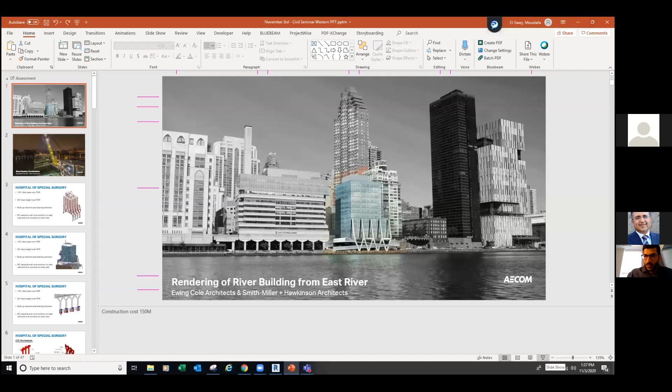Yes, okay. So before jumping into the main topic of today, we thought we would share with you one of the very challenging projects we've been working on for a while, almost 5 years now. It keeps changing even after we finish most of the design stages. It's the Hospital of Special Surgery, which you can see here.

It's located on the east side of Manhattan by the East River, and the unique thing about this project is that it's not built on land. The client had to purchase air rights from the city, essentially a volume of air he can occupy with structural and architectural elements. This provided challenges for us, as I'll talk about later, since we were constrained to the volume of air he purchased and couldn't go even inches out of it.

So this is our structure. It consists of 12 stories and a penthouse, and it's also designed to take 4 future expansion levels. It's made up of built-up columns and trusses to ensure it can span 100 foot across the FDR, and the highway will be functioning after this is built, with cars allowed to go underneath it as usual.

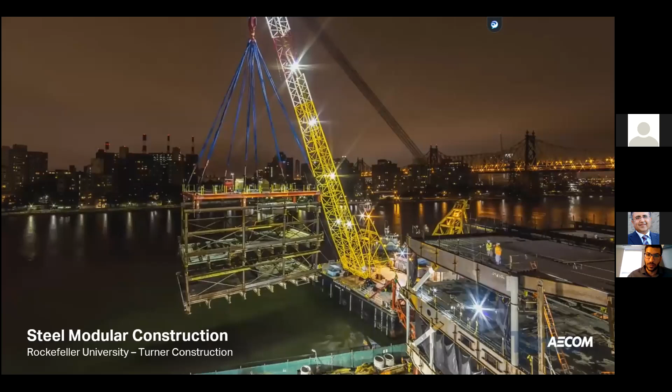We would divide the first 3 floors into 3 modules, constructed off-site and then carried on and placed on top of the highway. These would be spliced together. Then after the 3 stories are complete, we are able to build up on top of the existing platform and continue construction until the 12th floor. So that was one of the main challenges we had, and I'll be speaking about more challenges as we go through.

So here is a rendering of the structure, let me place this here. Okay, so here we have a rendering of our structure. This is actually the initial design we had. It spans 100 foot over the FDR, which flows in both directions. We also had a 20-foot clear height over the FDR.

We used built-up columns consisting of 4-inch plates. These are custom columns made to specifications and to the architectural shape we required on both sides of the structure. We also had RC caissons and rock anchors, not shown here, which drilled through the rock to ensure we have good lateral stability in our structure.

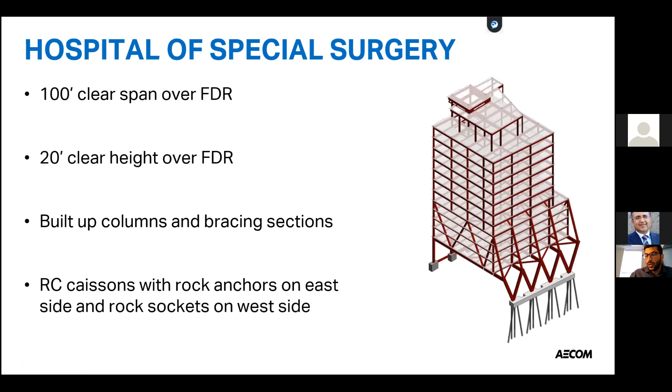As usual, architects are always our enemy when it comes to our design. They consistently change the design last minute. Even though we've been working on this for a couple of years, just recently they decided to change the shape of the Y columns. Suddenly the client doesn't like the way they used to look. So we had to come up with this new shape, a Y column made of 4-inch plates.

This obviously changed a lot of the behavior of our structure, the rigidity in both directions. So we had to add this built-up girder, which also consists of 4-inch plates. We also had to add horizontal diaphragms to ensure the load will be transmitted to all our Y columns.

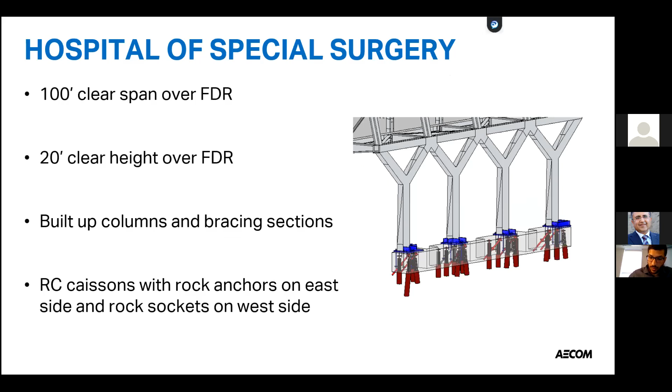Another challenge in this building, going back to this rendering, is that we had very limited air space that the client bought from the city. Since in Manhattan every square inch of space matters, the client obviously wanted to push it to the limits. So our steel framing at the bottom flange was exactly at the air right limit we had.

So we didn't even have space to spray fireproofing on top of the structural elements that are exposed to traffic. The code requires that any structural elements exposed to traffic be designed with either fireproofing, or if you deviate from the code requirements, you'd have to provide enough documentation and analysis to prove that your structure can take fire loading in case of fire.

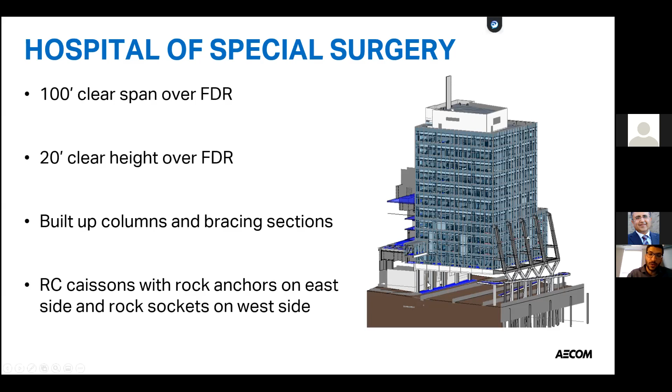Specifically, we had cars going underneath our building, so it's very probable that a car would catch fire for any reason, and then this heat or energy would be transmitted to our structure in terms of increased temperatures. So to convince the city that we didn't need fireproofing, we had to do some CFD fire analysis.

We had two cases. We had the flow of traffic traveling north across the FDR, in which case we would have the Y columns, and traffic traveling south, in which case we would have the west columns.

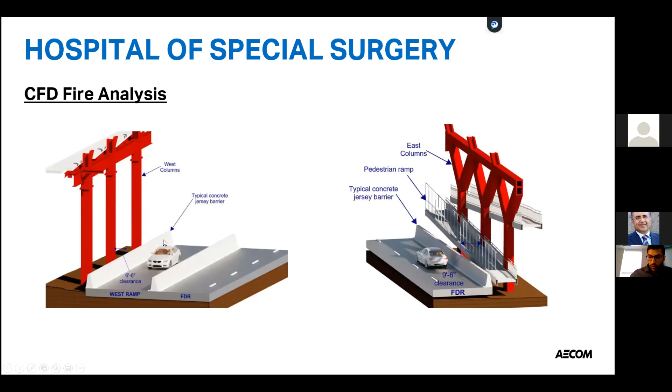So we performed CFD analysis on ANSYS, I believe the CFX solver, if I'm not mistaken. The several parameters we had to take into account were the ambient conditions, the direction of the wind, and the temperature of the atmosphere at different times of the year.

Also, a big part of the input was the type of vehicle that is prone to explosion or fire, and this was a big back and forth with the client until we reached a suitable vehicle. Corresponding to this vehicle, we would get the amount of energy, or a curve of the energy with time, produced by this vehicle. After obtaining this information, we would be able to run the analysis.

Basically, what we need from this analysis is the temperatures along the surface of steel or columns. Based on this temperature, we would have two phenomena: steel at elevated temperatures would experience a reduction in the steel material properties, and there would also be some thermal loading transmitted into our structure due to expansion of steel.

So after producing this fire analysis and applying the modified steel properties and the loading into our finite element model, we proved to the city that our structure can withstand fire loading safely without any fireproofing. So this was a big part of the project.

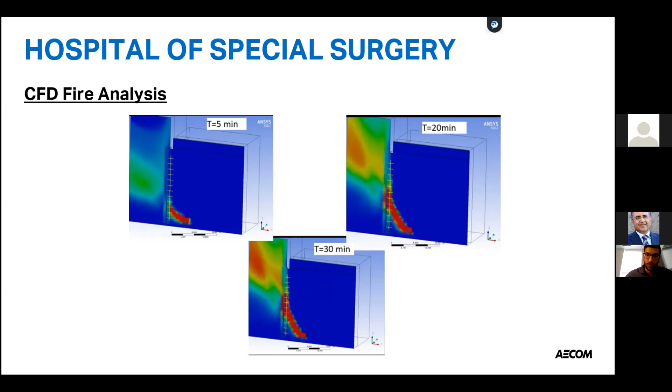Our calculations were peer-reviewed by a third-party reviewer, and they showed that they were suitable and everything was good. This was approved by the city. And then...

Let's dig into the topic of today's talk, which is the vessel collision analysis and design of a pile-supported fender system. This was a very unique project to me, and I think to our office, because this is the first time we were actually working on this. This was a proposal, and then we finally won it, and I think we just completed the 100% design recently, and construction is supposed to happen soon.

So an outline of what I'll be going through today: I'll start by talking about the introduction of why a fender system is needed, what initiated this movement, or the motivation of the research to look and analyze systems under vessel collisions.

I'll also touch on examples of different fender systems ranging from different sizes and different shapes. Then we'll discuss the vessel collision analysis and the different aspects we have to take into account. Fender system design, which I think is probably the most challenging part for me, as it requires a lot of experience.

Constructability aspects and details, and what we had to think about ahead of construction to make sure that we had no issues during construction. And finally, a summary.

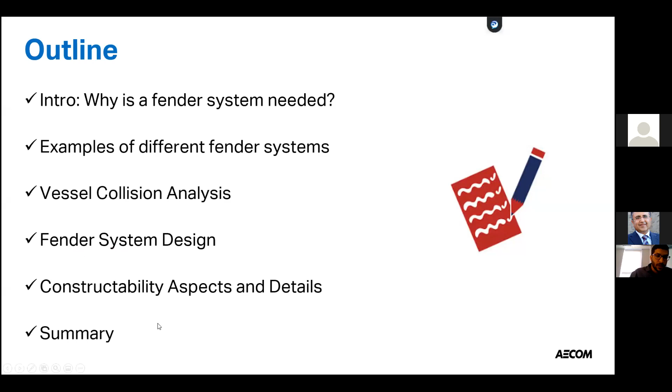Okay, so it all happened in 1980. There is a bridge called the Sunshine Skyway Bridge, situated in Tampa Bay, Florida. It was a peaceful day. You can see the bridge had, there were actually two bridges in parallel, one for the northbound traffic and one for the southbound. And then on this specific day, the weather conditions were really bad.

This caused a huge vessel, a 35,000-ton deadweight tonnage bulk carrier, to collide with one of the bridge piers. This collision caused excessive vibrations in the girder and in the deck, which caused the collapse of a span of 1,300 feet, approximately 400 meters.

And I apologize in advance. I know you guys are used to the meter system, but in the US, we use the feet, the imperial units—I mean, the English units, sorry. So I'll try to mention both in the presentation.

This collapse caused 35 lives to be lost, which was very unfortunate. And then a few years later, in 1987, you can see they built the new replacement bridge.

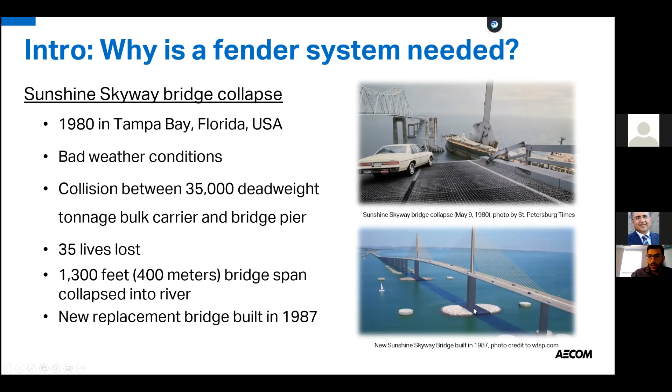And here's the new bridge, which still stands today. As you can see, they implemented some of the fender protection system, which I'll be discussing in the coming slides.

After this collapse, this was the first rise of guidelines providing hints and good engineering standard practices on what to do when designing a bridge pier to take this vessel impact. It's called the Guide Specification and Commentary for Vessel Collision Design of Highway Bridges, developed by AASHTO. It was first published in 1991, and later updated in 2009.

Basically, what they updated was removing most of the simplified methods. In 1991, the computational power of computers was not as advanced as today, so they included more sophisticated types of analysis and removed some of the very simplified methods.

This is adopted today for all bridges constructed in the United States, only if they have a channel where vessels or ships can go underneath.

The basic concept of this guideline is to minimize hazard to life. Risk of bridge service interruption is minimized to ensure reduced losses and reduced lives lost due to any collapse.

Specifications need to be simple and unambiguous. Ingenuity of design is not restricted, so AASHTO allows you to use any type of analysis you prefer, given that you can prove it works. And the provisions are applicable to all of the United States, as mentioned previously.

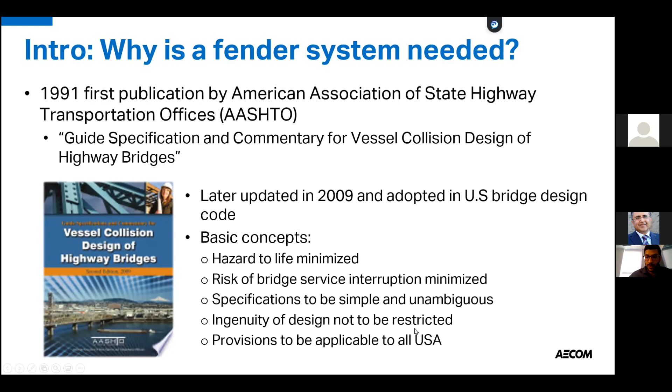Energy absorbing fender protection systems are used worldwide. This is a very common system for low impact forces, where you'd provide fender systems along the edge of a pier or along the edge of a slab where ships are expected to be traveling.

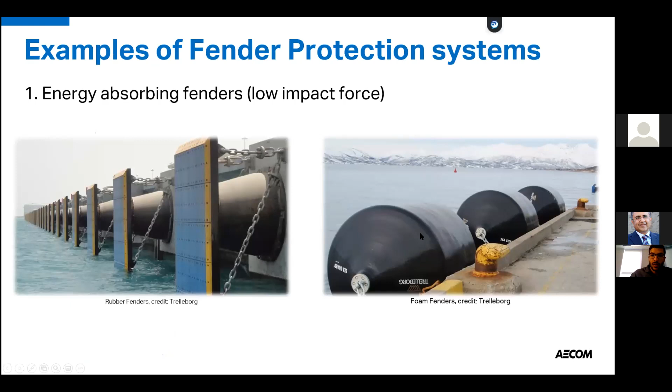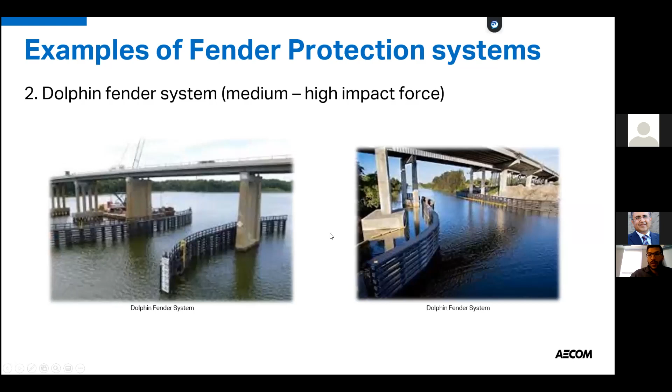Going on to a higher impact force system, which is a Dolphin system - basically piles drilled into the ground and a wall system which would redirect the vessel in case it steers off its path. Here's another view of this Dolphin fender system.

Finally, a system used mainly in the past was the cellular cofferdam system, which consists of sheet metal drilled into the ground. There's an interlocking mechanism in those sheets, and then you'd fill it with soil to provide good solid inertia and also to prevent these thin walls from buckling.

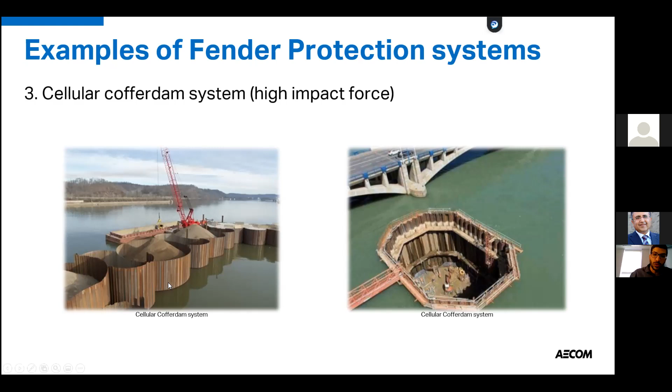Jumping into the vessel collision analysis, AASHTO considers this an extreme event, which is very unlikely. So you would not need to increase or provide any load factors - the load factor is 1.0.

There are several methods to absorb this force. You can design your system as a sacrificial system or a non-sacrificial system. From the wording, sacrificial means that after the collision happens, the system would not be usable anymore, so it would have to be replaced. The behavior we're expecting here is inelastic.

For a non-sacrificial system, you want the system to still be usable after the collision, so you'd have to ensure the behavior is elastic. This approach is very expensive and rarely used.

Finally, the simplest approach is to actually design the bridge pier itself to take this collision. You don't want the bridge to collapse, so you'd have to ensure the behavior is elastic.

Going into the numbers and details: the way to determine this force and energy is based on several parameters, a big part of which is the risk and geometric probabilistic analysis, which I'll touch on later. It's also a function of vessel parameters - how much you're expecting the vessel to weigh, its cargo capacity, the dimensions, and the speed of the vessel.

You're also considering the channel parameters - the flow of the river, the speed of the river, the channel width - and most importantly, the bridge parameters: how important this bridge is. This is similar to the importance factor in conventional design. If a structure is more important, you'd multiply the forces by a higher factor to reflect this importance.

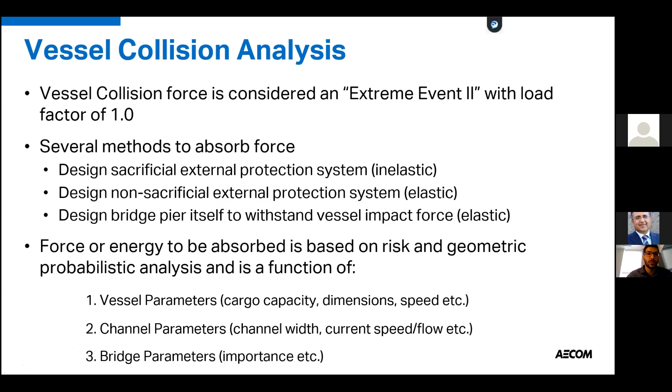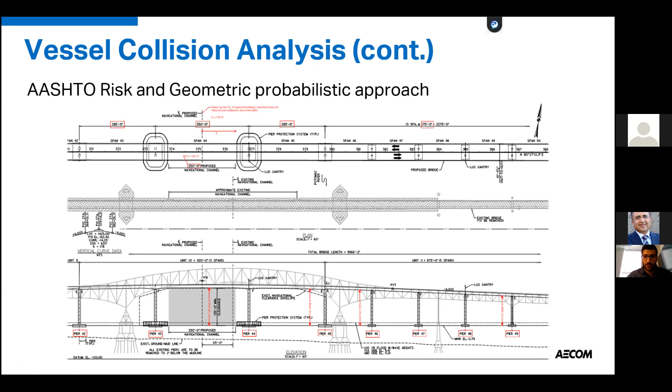So you should also consider different impact angles. Obviously, the sharper the impact angle, the less likely it's going to occur, which leads to less force demand that you need to consider in your analysis, or energy demand essentially.

This is a chart from AASHTO which shows that as you move further from the center line of the vessel movement, your velocity decreases, which makes sense. And velocity is directly proportional to energy, so as the velocity decreases, the energy decreases.

So just to give you an example of the type of energy or impact we're expecting for this specific design, for the collision shown in red, which is a head-on collision with an angular deviation of zero, this requires 44,600 kip-foot of energy, which I know can be hard to get a feel for.

But another way to think of it is that this is equivalent to a typical sedan car, which weighs 1,350 kilograms, traveling at approximately 330 meters per second, equivalent to the speed of sound. So this is a huge amount of energy that you need to absorb in your system.

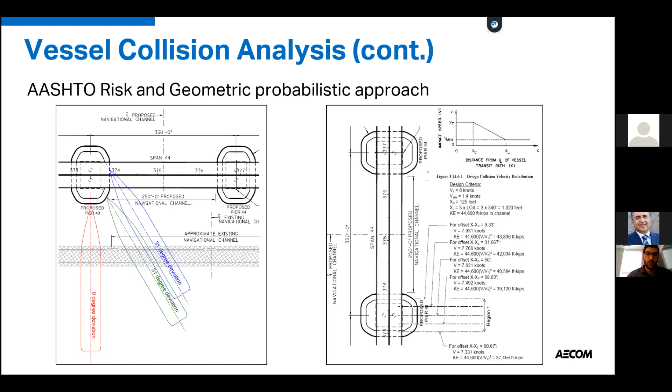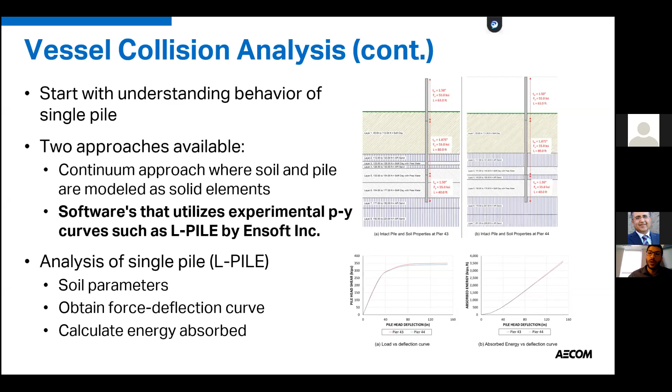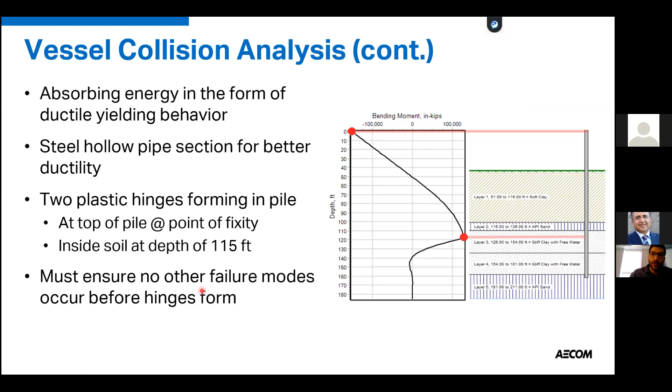And here we have our soil layers. We had different types of soil, nothing special, nothing problematic according to the geotech. It was very vital for us to ensure that we would get our full ductile behavior and not have any other mode of failure happen before these hinges form.

But as you know, LPILE has certain limitations, which is very important when working with any software. There's a famous saying: garbage in equals garbage out. If you're using software and don't know its limitations, it's of no use. A software is only a calculator for you—if you don't know what you're punching in, getting answers is never going to work.

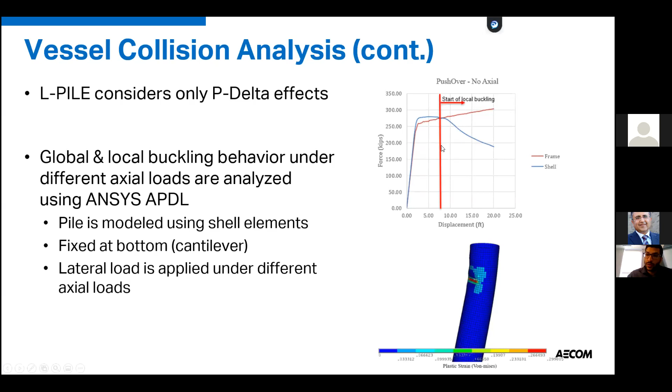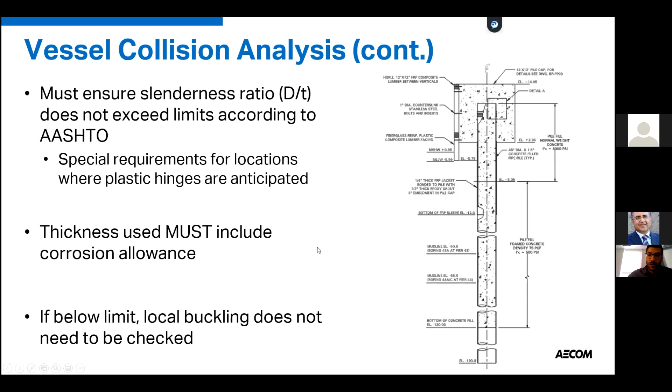These are the corrosion values we were given. For the first portion, inside the FRP jacket, we had 0 corrosion inside and outside. For the part submerged in water, 0.03 inches inside and 0.075 outside. And for the part buried in soil, 0.03 inside and outside.

The reason the part buried in soil has less corrosion than the part submerged in water is that corrosion is directly related to oxygen availability. In soil, the available oxygen is less than in water, so we get less corrosion. This is the total amount of corrosion we had to consider in our analysis.

The code provides slenderness ratio limits based on whether your section is filled with concrete. Obviously, if it's filled with concrete, the concrete provides bracing to the walls, so the requirements won't be as stringent. It also provides special requirements for locations where plastic hinges are expected to form.

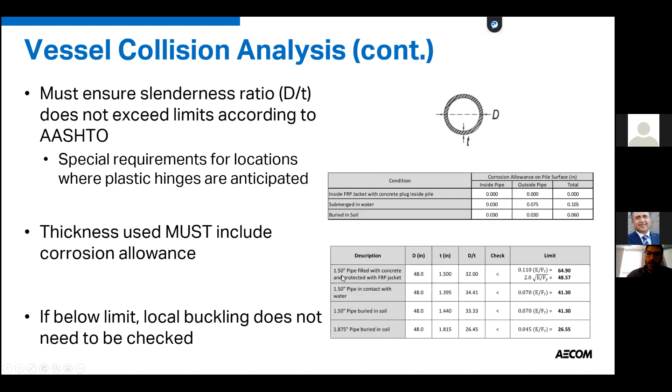We had to take into account all of these limitations, and these are the thicknesses we reached. We had a varying thickness along the height of the pile.

So after understanding the single behavior of your pile, we can now move on to the global behavior for our system. Here's a plan view of our system. Our pile cap fender system consisted of 12 steel piles.

Each pile was 4 feet in diameter, and the thickness varies from 1.5 inch to 1.875 inches. Here's the pier that we were trying to protect. We tried several times back and forth with the bridge engineers to make this as small as possible so we can get enough clearance to allow for more energy absorption. So it's back and forth, and this is as small as we can get them to reach.

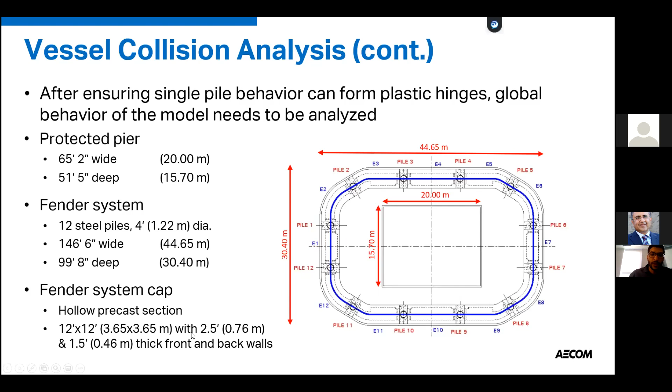Our fender system was approximately 45 meters by 31 meters in dimension. We also had to ensure that we reduced the P delta effects since we were considering large displacements of the system, which pushed us into this option of using hollow precast sections. We would have a 12-foot by 12-foot section with a thicker front wall than the back wall, because this is where the vessel would impact. The front wall was 2.5 feet thick and the back wall was 1.5 feet thick.

Here's a snapshot of our full model. This is done on ANSYS, as I mentioned previously. Everything was modeled using beam elements. The piles were modeled using beam elements, beam 188, for people who are familiar with ANSYS.

The model considers a lot of nonlinearity. Here are some of the things that it considers: full nonlinear stress strain behavior of steel, P delta effects including small P delta effects, pile soil interaction since we had our soil modeled as nonlinear springs, and also global buckling effects. Soil is modeled using nonlinear springs, the COMBIN39 element.

Also a big challenge here, which is also fun for me, is how to connect software together. So we had to develop a script to read the LPile output text files and convert these springs to ANSYS. You have to keep in mind that each of these piles is approximately 190 feet, and you would have a spring at every 1 foot, obviously in the part which is buried in sand. And the spring was a full nonlinear curve with different points, and every spring was different because soil behaves differently as you go deeper.

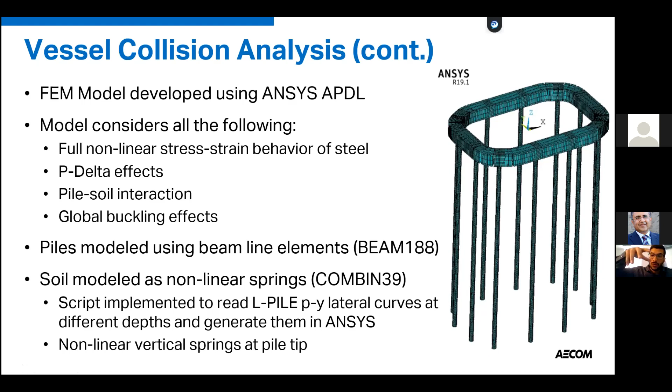Initially we placed stiff supports at the bottom because we were not expecting the piles to exceed the vertical axial capacity. But later on, we noticed that the reactions we were getting at the bottom here exceeded the pile capacities. So we had to replace the vertical support with springs. This meant that the piles moved laterally and also moved vertically, so we're getting full 3D movement in every direction.

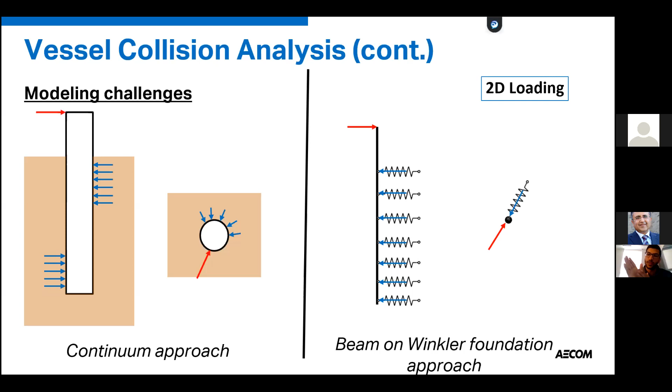Keep in mind that we had a full pile cap, so it was rotating around the center of rotation, a specific center of rotation, and each pile was moving tangent to a specific circle. So it wasn't a matter of just making all the springs in one direction, which can be seen here. We would determine before the start of analysis, based on the loading we have, different load cases, the center of rotation—basically the same idea as when you have a bolted connection, a bolt group, and you need to determine the center of rotation for the bolt group under moment. Same idea exactly.

You would get your center of rotation, and then you would draw circles to each pile, and then obtain the tangent to this circle, and this is where your spring has to be placed.

But another issue we have is that these springs are not constant, the center of rotation is not constant. As these piles start to laterally shift, certain springs at different levels start to yield, so the stiffness of the system essentially changes as the load increases.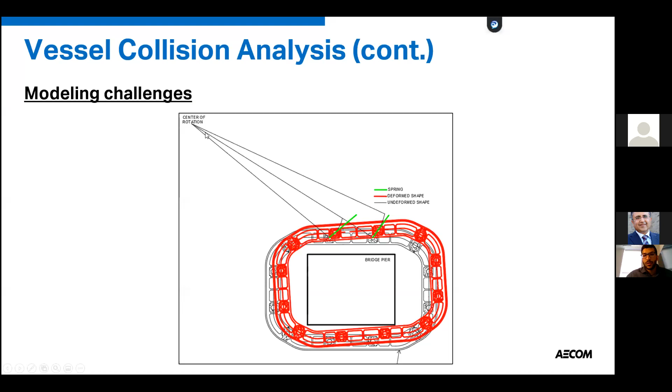So we had to think out of the box, took a whole week of coding and thinking of how to work with the limitations we have of the structure analysis software we have. So this is the workflow we developed, starting from initially, I'll go through it all, even though I mentioned some parts previously.

So we would start with our soil and pile properties. This would be input into LPile, and then LPile would spit out the nonlinear P-Y curves at different depths. And then using a script, we would input this into ANSYS and convert them into nonlinear springs.

And then we would pick our load. We always tried to make our code parametric, so that as the project advanced and we went into more detailed stages of analysis, we would be able to accommodate changes in geometry, changes in loading, changes in parameters we assumed at the start. So this was very important in this project.

So we had load cases as one of the input parameters, and then this would automate the full fender system. And then inside the code, we would calculate the instant elastic center of rotation, and then align the springs for each pile depending on its location.

And then we would basically do what nonlinear software usually do. When you're solving anything nonlinear, you're always solving in pieces of increments, because your curve is not linear. So in order to capture the changing slope of stiffness or whatever you're solving, you have to solve it in small increments.

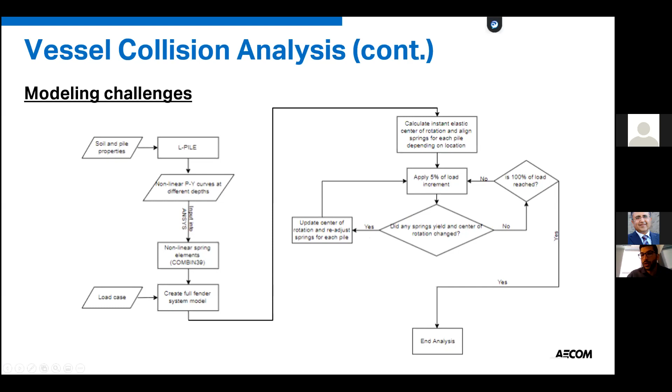And then this is our analysis. So we had to take into account 2 loading cases, which is also very unique to this project. In typical structures, your stiffness of your structure does not change with time.

But in our case, since we had corrosion, as time passed, these piles would get thinner and thinner, so the stiffness would decrease. So the behavior of the structure essentially changes. So you have to think of a lower bound and upper bound approach.

Scenario 1 is where the pile cap is supported on very stiff piles. This is assuming that the piles did not corrode, and the pile's material strength is taken as the upper boundary strength.

And this is very important, specifically in this project, because when you go to a steel manufacturer and you order, let's say, a specific grade of steel, 50 KSI steel, this 50 KSI is the minimum requirement for the members to come in. This does not guarantee that all your members or structural elements will come in at 50 KSI. This is just a minimum boundary.

So actually, in a lot of cases, the manufacturer always targets a higher number to ensure that none of his samples would fail if subjected to testing. So we had to assume that the piles came at the maximum upper boundary strength of the material, and this case would be used to design our pile cap, because this provided the maximum straining actions in our fender system pile cap.

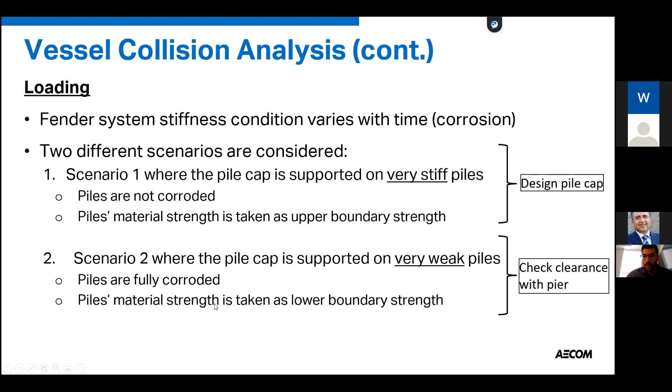And scenario 2, which is used to check the clearance, is based on the pile cap supported on very weak piles. So here we assume that the piles are fully corroded, and the pile material strength is taken as the lower boundary strength.

So we had a total of 6 load cases, and for every load case, we had 2 scenarios, scenario 1 and scenario 2. So we had a total of 12 load cases to look at. And the load combination per AASHTO was under the extreme loading extreme event scenario, you would only consider dead load, but you would increase it by 25%, and as I mentioned previously, you would not factor up your vessel impact.

The loading stages we performed: first, we would apply just the own weight of our structure, initializing the stresses in our structure due to own weight. And then we will apply pushover analysis in the direction of the impact of our vessel. And then the output of this analysis would be a force deflection curve.

It was a displacement control analysis, but as many of you know, you can actually obtain the reaction of the displacement applied, so basically the force required to perform this displacement. Then by integrating the area under this force-displacement curve, you would get your energy displacement curve.

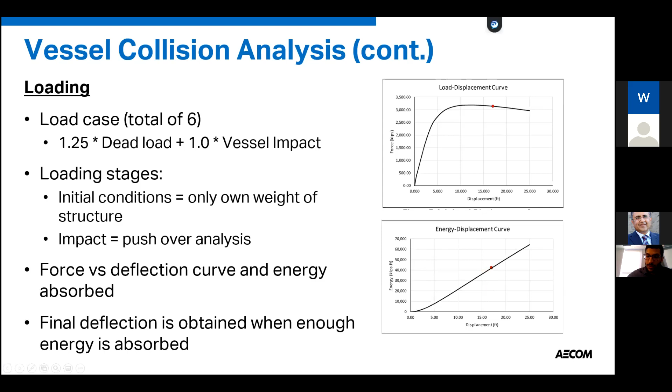For a specific load case and certain impact angle, we know the energy because we calculated it previously, so we would see the energy deflection curve. For example, in this case we're looking at 44,000 kip-foot, and we know that we need approximately 17 feet of displacement. After we know how much displacement we need, we would look at the deformed shape at the specific displacement where we have enough energy.

We had to make sure that we are not touching the pier, essentially, because we couldn't pass any load of the vessel impact to the pier, since it's not designed to take this impact.

And in some cases we had... you guys can still hear me, right? Because I keep getting messages. Okay, sorry, I thought I disconnected.

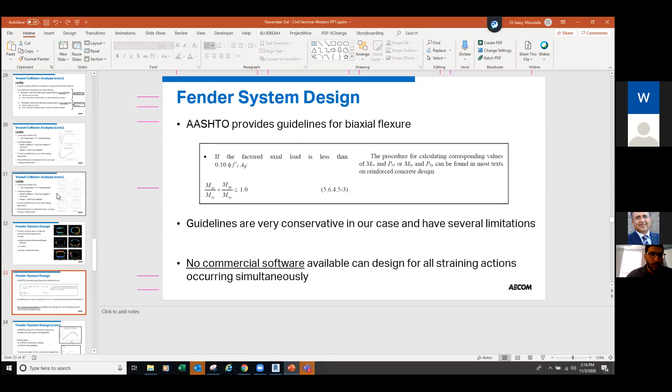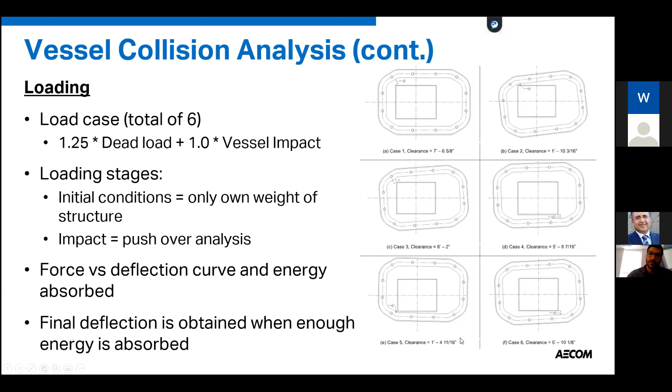Obviously making this bigger increases the cost to the contractor, so we had to make sure we were as close as possible after the impact. I think in the worst case, case 2, we had a clearance of almost 2 feet, or even here we had 1.5 feet, which is tiny as you can see, but it still worked.

Coming to the fender system design, as you can see our fender system, fender cap was subjected to all types of straining actions possible. Anything you studied in your undergrad - axial, moment, torsion, shear - everything was there.

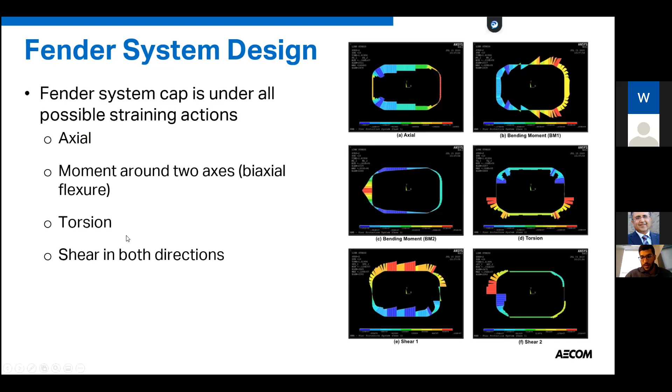We had axial compression and tension, we had moments around the two axes, we had biaxial flexure, we also had torsion, and we had shear in both directions, which was very challenging to design. But we have a couple of smart guys in our office who I learned a lot from, which helped in this design.

Going back to AASHTO, we tried to follow AASHTO guidelines at the start. AASHTO provides guidelines for biaxial flexure, as you can see from here, which is typically used for simple buildings or simple design. But we noticed that this biaxial flexure relation is very conservative and has several limitations.

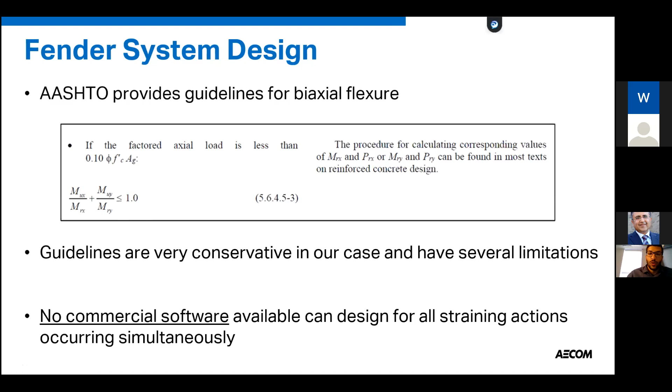At the same time, we had no commercial software available that can design for all of the straining actions occurring simultaneously. We kept looking if anything was available, but nothing could handle all of the straining actions you saw happening at the same time.

So we dug deeper into AASHTO, and AASHTO actually allows you to design using your own method, based on equilibrium and strain compatibility, which is what we ended up doing. We had to develop our own Excel sheet programs to do this, which I'll touch on later.

The strain limits we took into account were 0.003 for concrete crushing and 0.02 for steel yielding. We could have taken a higher value for concrete crushing because our concrete was confined, but we found this to be good enough and conservative, which is always good.

The tensile strength of concrete is neglected, so we assume that as soon as there's any tensile stress on concrete, it's cracked. Since we had full control over the program we were developing, the Excel sheet, we input the full stress-strain curve of concrete and also the stress-strain curve for steel.

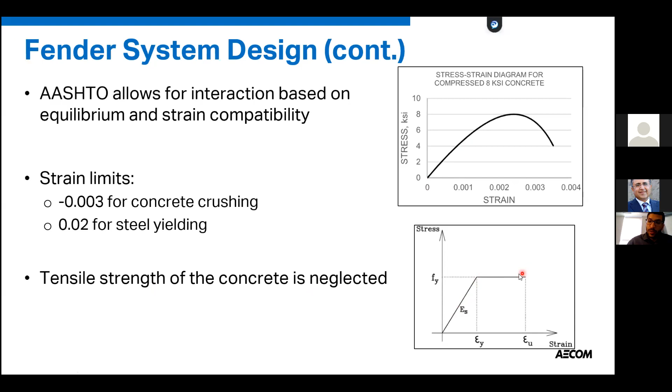For steel, we assumed something simple: linearly elastic, then fully inelastic, so a bilinear relationship. And here's the methodology we applied.

Just before diving into these steps - typically, if you have one direction of flexure around one axis, you would have your compression zone, which is a perfect rectangle, and your neutral axis would be along the x-axis. But since we had biaxial flexure here, your neutral axis would no longer be parallel or along the x-axis, it would actually be inclined.

This is super hard to do by hand, so we had to develop this Excel sheet. The idea behind it is very close to what finite element software actually does. We divided our concrete section into 1 foot by 1 foot cells, small cells where we'd actually be able to get the stress, strain, and forces on these cells independently.

We applied strains at the corners to the limits, and since we assume everything is linear strain, if you know the strain at the limits, you'd be able to get the strain at the limits, and we'd be able to get the strain at any location.

After every iteration, we would check the strain in the concrete and rebar based on strain compatibility. Stress in steel and concrete is then determined from the stress strain curve I showed previously. Knowing the strain, you can get the stress, and knowing the stress, you can get the force since you have the stress and area. Then based on the distribution of forces, we can get the moment around our neutral axis.

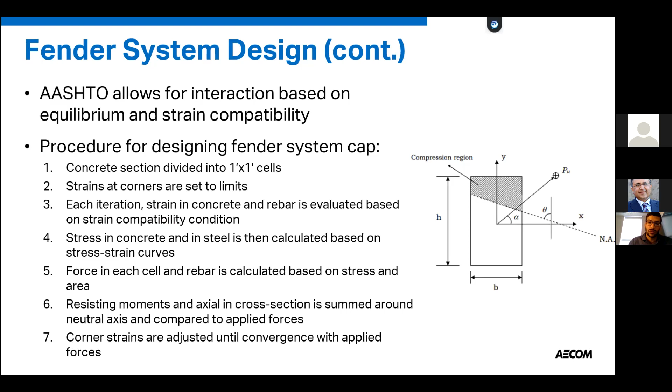We compare this moment and axial force with the applied external force, and keep adjusting the strains at the limits, at the corners, until we reach equilibrium. This equilibrium means that the assumed strains and stresses equal the external forces, which implies that everything is stable. So here's just a quick snapshot of our software.

Huge help from there's a Russian engineer we have, super smart guy, who I'm learning a lot from. He mainly develops and helps on these spreadsheets.

So here's a stress strain curve. Since we have a hollow section, this is a strain of 0, and we have compression here and tension here. It's also slightly inclined to this corner since we have biaxial flexure. The stresses in the concrete here are 0 since this is under tension, and then here we have compression stresses in our concrete.

The software allowed you to input the coordinates of the rebar you had, and you would enter the coordinates of your concrete section. Since we had flexibility and control over the software, we were able to actually get the stresses in each rebar individually, which will be very useful when we design for torsion, as I'll talk about later. Here's just a small snapshot of the Excel sheet, I think 200 or more rows. It took a lot of effort from us, but we did it.

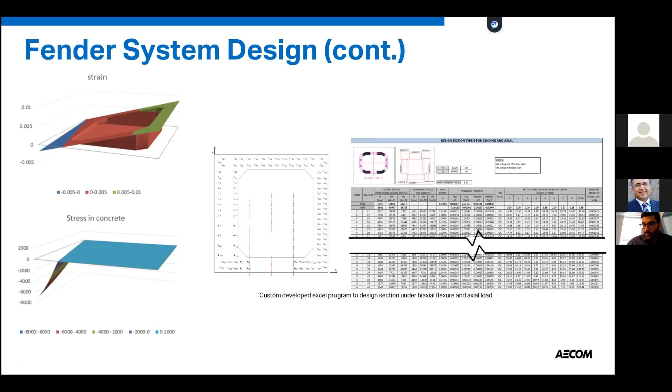So we knocked out the axial and biaxial flexure. We had torsion and shear left, in both directions. Torsion and shear are a lot easier, even though in my undergrad I was told that whenever you design anything and see any torsion on your beam or structure, you should know there's something wrong. But since this is a very unique structure, we had to expect torsion.

The torsion was mainly developed due to the pile fixity. The pile comes in, goes through the pile cap, and has a restraining moment, so it will apply torsion on your pile cap. Again, we developed our own Excel sheet for this.

Due to torsion, we get shear flow, but we also get an axial component due to torsion. Usually what people do when designing for torsion is get this axial component and then just add reinforcement equivalent to the required axial force. But since in this case we know exactly the rebar stresses and how much the rebars still have in the tank to reach yield, we were able to utilize the rebars already existing for torsion without adding any extra reinforcement. This was certainly a very big cost saver for us.

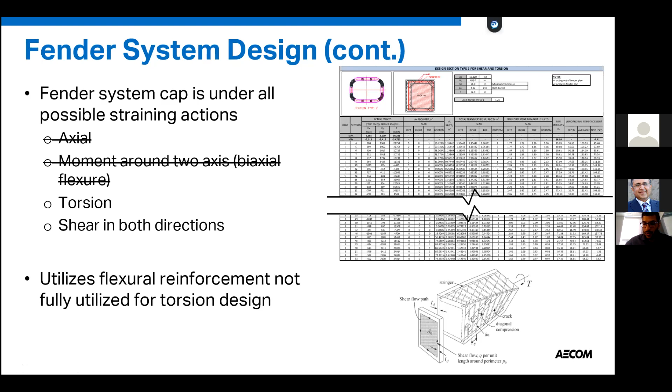So some of the special considerations we had to think about, which we kept figuring out as we kept diving deeper into more details.

We had to make sure that at the location where the pile is inserted into the pile cap, we would not get any shear failure, since we could not put stirrups on top of the pile because it's going through the pile cap. So we drew 45-degree shear failure planes, and had to make sure we had enough stirrups along these shear planes to develop our shear capacity, which resulted in a more dense area of stirrups around our piles.

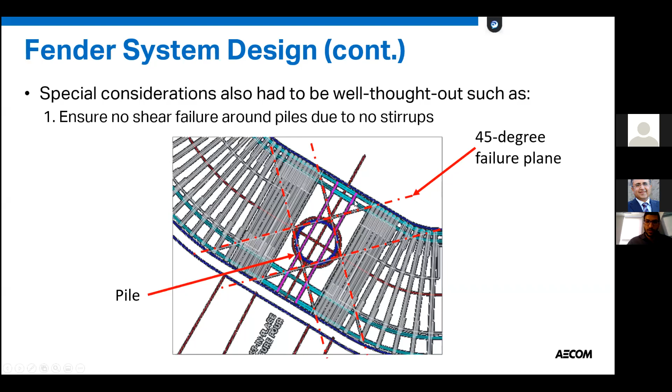Another consideration we had to take into account was making sure that when the vessel impacts our pile cap, it doesn't just tear through it and go straight into the pier, because then all our analysis is based on nothing. We had to make sure that when the vessel impacts the pier, we had enough capacity in our facing wall to distribute this load, essentially like a two-way system.

So we had to use the yield line theory based on the UFC guidelines, the Army Corps guidelines. They're available online, or essentially the yield line theory is explained in any concrete book. Without going into details, you would divide your wall into panels based on the load and the expected shear lines or yield lines you're getting, and then do the equilibrium for each panel.

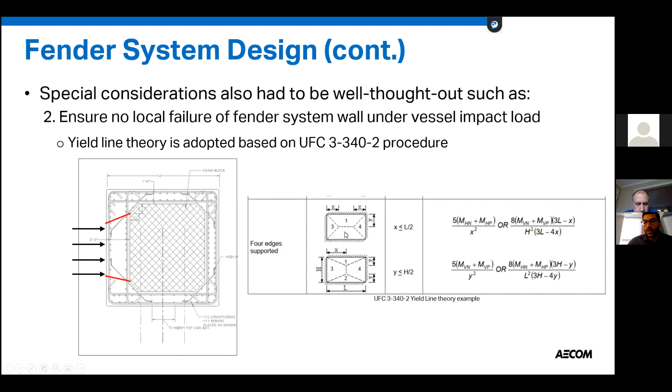And then we were basing all our analysis on the assumption that the pile is fixed into the pile cap.

Checking the time, I think we're going out of time. Moustafa, we would like to give some time for questions. Yeah, okay, give me 2 more minutes, I'll just speed through this.

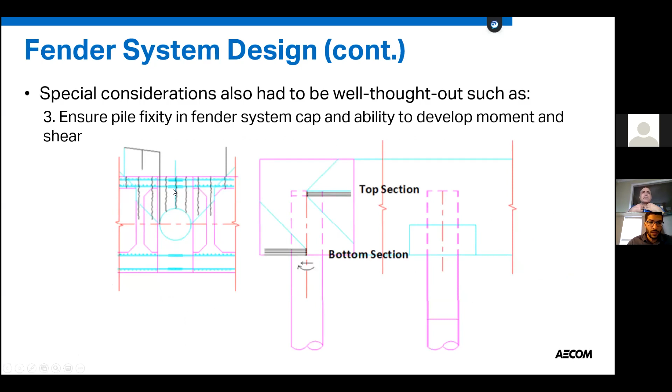So essentially here we were checking, it's similar to a big bolt. We're checking that the pile doesn't tear through the cap. Here we were checking if the pile does not tear vertically through the pile cap. So we had to check this also.

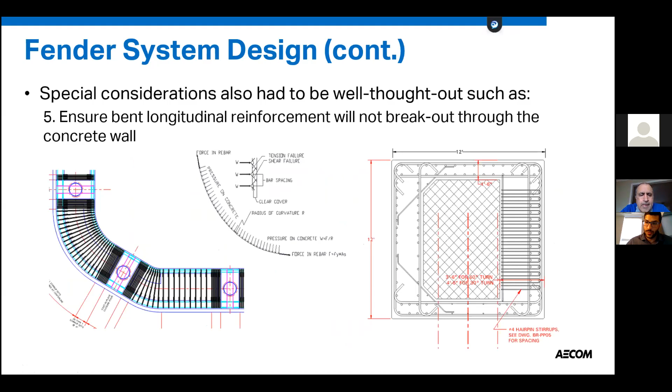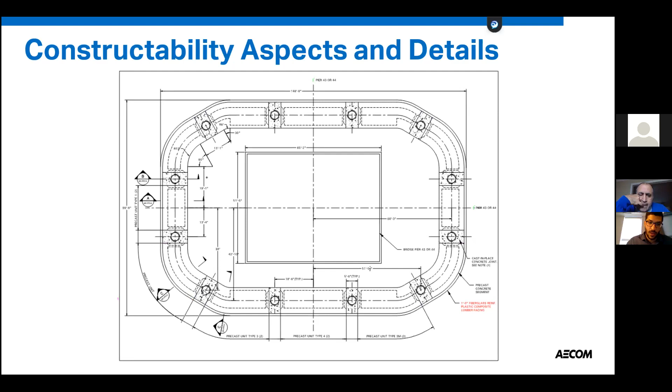And then finally, the construction: these come in modules. So these precast pieces come in sections, and then they would be placed on your piles. And then we would fill the piles with concrete, and it's good. So here is just a schematic. We would have a pile cap here, it would be placed on the pile, and then the other piece comes here, and then you would fill with concrete.

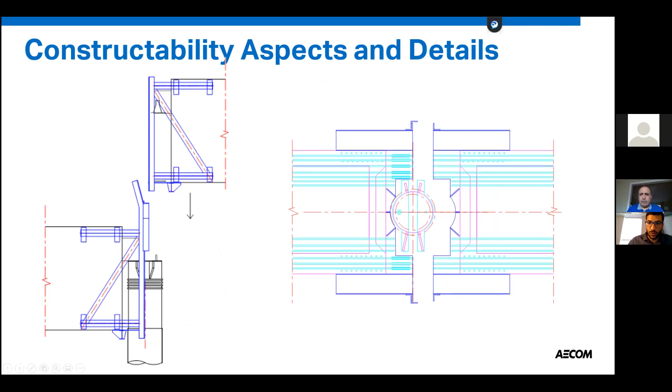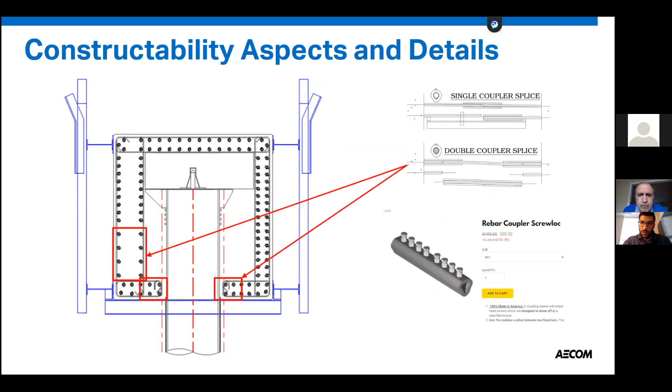And here is where we would couple them. The couplers, this was a big price item. So we had couplers for all the rebars, and each coupler cost $99, so it was a big chunk. Each fender system cost $5 million. And we had 2 details for the coupler splice, double couplers and single couplers.

And the summary, I think we can skip. Okay, I'm sorry I went over the time.

Okay, so we'll try to take some questions. Personally, I have a general question I'd like to ask Moustafa El-Sawy about. I want you to elaborate about the advantage, or if there is a benefit of doing graduate studies when you hire engineers. Do you think that doing a master's or PhD distinguishes the engineer? What is your comment about that, Moustafa?

I think more and more the master's is becoming a must. The market is very competitive now, and we see very strong resumes. You'd be amazed at the resumes that we get. You see candidates with more than one master's degree, with expertise in many subjects. So I think in this market, the master's is becoming like the bachelor's of my generation.

I also find that in order to get a good opportunity, you shouldn't stop at the master's level. You should also have the advantage of knowing the software the industry is using. So when I get a resume from someone from a very good school with a master's degree, but he doesn't know the software that other candidates have, I think about it in terms of money. Somebody who knows ETABS and SAP and SAFE and Revit, for me, this is a hot cake. I'm not going to invest in teaching him.

In the past, we used to get engineers out of school and arrange seminars and teaching lessons to get them up to date with these softwares, and that was costing money. But if I get someone who already knows those softwares and has a master's, that's definitely a plus.

As far as PhD is concerned, we have a big number of PhDs in the group. They used to make, and still make jokes about that in the office. In the business line, they say the structural group has more PhDs than the hospital at the corner, okay?

And I see this very helpful because we are able to attract work from other groups because of what we offer that they cannot offer. AECOM is a big company and it has branches all over the US and outside the US. And we attract the work from the other regions and outside the US, but by what we can offer. So if we didn't have these PhD candidates, we wouldn't have been able to deliver this work.

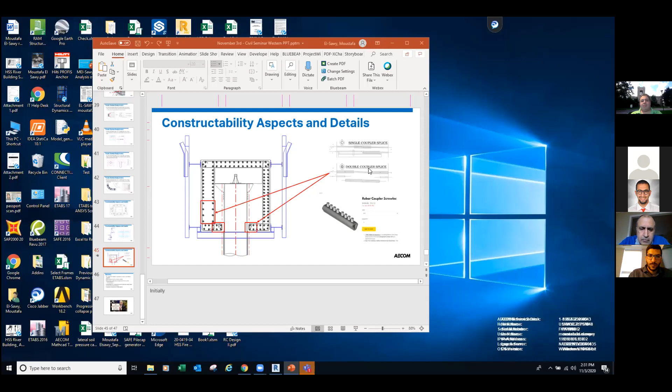A lot of the work that we get is in problematic stages, like in construction, they find a problem, they cannot solve it, they come to us. Something very special like this, the design fee for this Fender system is close to $1 million. So that kept MJ and a couple of other engineers working for quite some time.

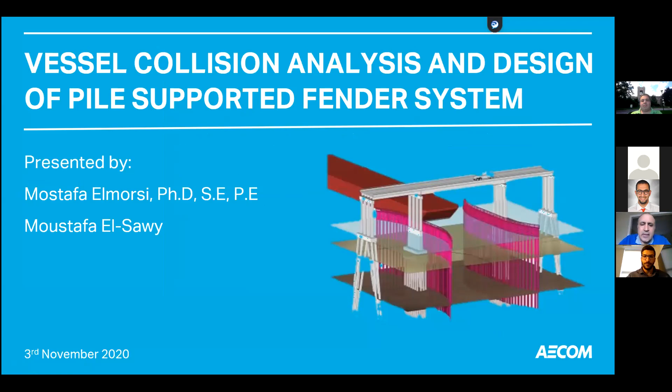So I'm always keen on hiring this top caliber. To summarize, a master's is becoming like a must, and a PhD is something great to have. Yeah, and on top of that, the softwares, I cannot stress more on that. Softwares is very important. I think this presentation was very nice, Mustafa, because it elaborates many things, like the need of fundamental mechanics understanding, understanding of design, understanding of engineering, software, and even programming.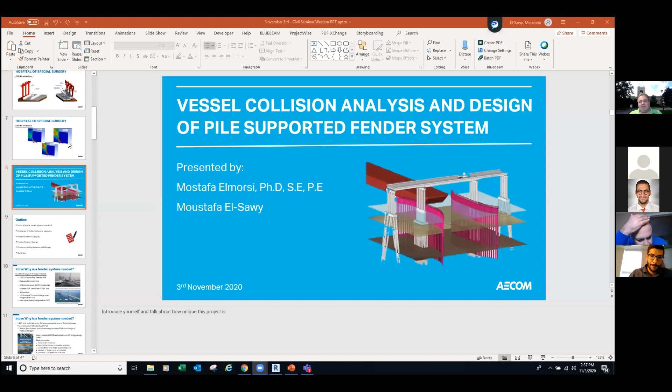Yes, we did consider that thermal effect on the design. One thing we noticed is the effect of thermal stresses on the connections. This building's connections were designed exactly for the loads on the structure. So when we applied the thermal loading, we found that these connection forces increased quite a bit, especially at the lower levels. So these loads were considered in the design of the connections.

Adding to this, Dr. Mehdi Yusuf, we also checked the maximum temperature we had in our column. There's a certain number, I don't remember off the top of my head, that if we don't exceed during fire, the column would go back to its original shape, so there won't be any inelastic deformation. Maybe that's what you were concerned about. So we didn't pass the threshold for inelastic deformation, basically.

Since it's study week, we can take two more quick questions. I see in the chat there was a question. First question was to Mostafa: how was your transition from the Canadian code to the American code?

I didn't have much experience in Canada. I did some private consulting with my professor, but I believe the Canadian code and the American code are very similar, it's just a matter of maybe different factors. We also have a recent hire who came from Canada, who was also from Western, in the geotech team, and he had no issues adapting from the Canadian code to the American code. They are very similar, it's a matter of knowing your basics.